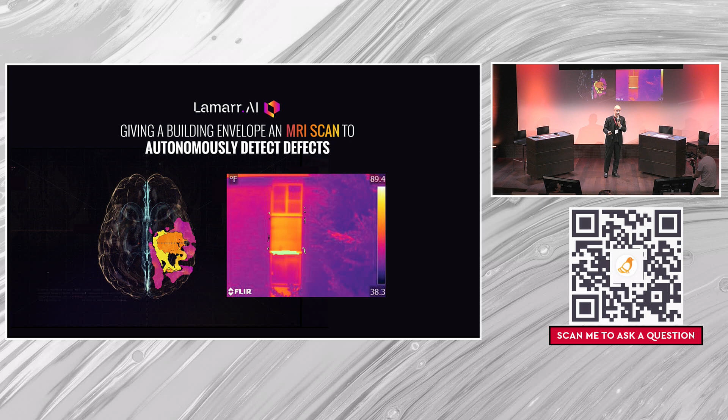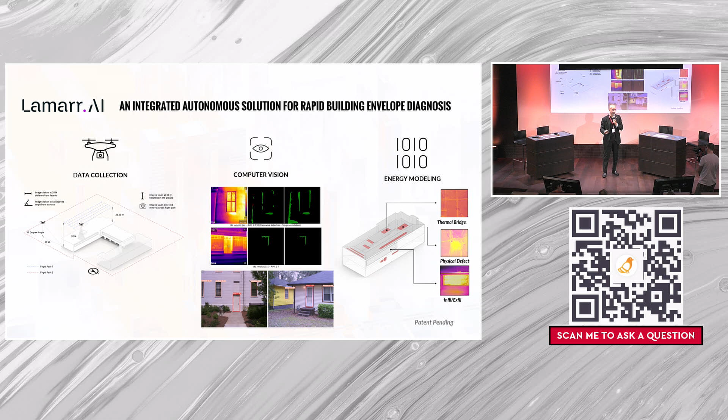It is an integrated autonomous solution for rapid building envelope diagnosis, which includes the data collection itself, the use of computer vision to identify and then analyze those thermal anomalies, and then inputting those into a 3D model, a digital twin that then produces an energy model.

So the company provides any one of these, or a subset of these, or all of them: flight planning, data collection, automated image processing based on a machine learning model, geometry construction using RGB images and photogrammetry, and energy modeling. By way of thermal images, we have a machine learning model that identifies and then

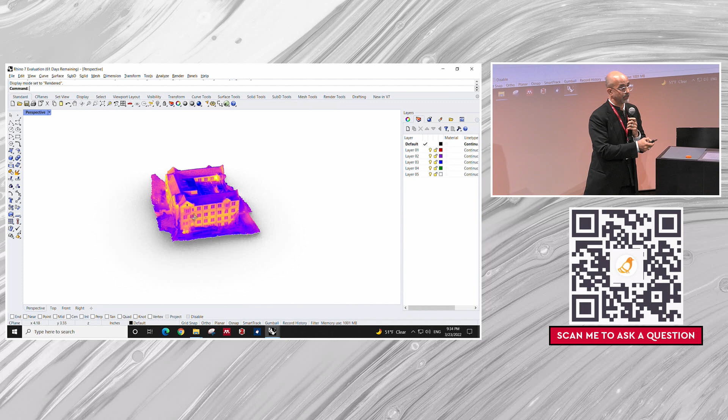classifies those thermal anomalies and then places them on the photogrammetry-produced 3D model. Those anomalies in yellow that you see there are tagged, they're identified, and they then lead to the building energy model. Today, our algorithm sits in the cloud, and a user uploads those images. The analysis: we can analyze 1,000 images in under 1 second to give you the identification and the classification.

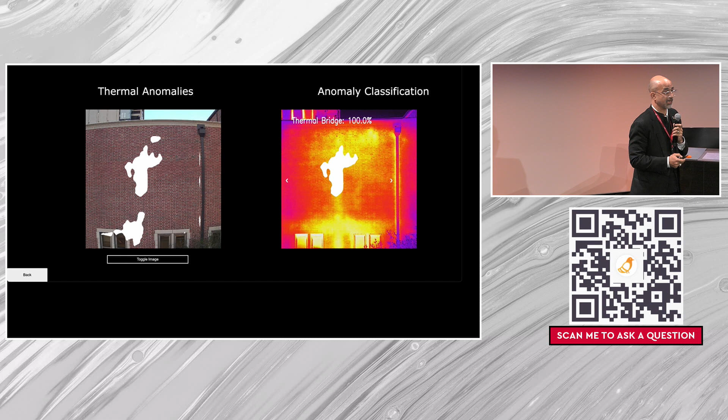And then the user can click on those anomalies to then decide how to repair, how to respond to that thermal anomaly in the building.

Our technology saves 85% in time, 90% in cost, and is safer and more accurate because you don't have people at the site climbing buildings or on scaffolding with a handheld thermal camera.

The market is about 150 billion globally, 41 billion for US retrofit, and 22 billion the envelope retrofit market. In particular, our beachhead markets are New York and Boston, although our contracts now are national in the United States.

Our 2 revenue streams: the first product is for large building operators, owners, and managers to upload data, have it diagnosed, and then to repair. Our second market, which we will start in about a year or so, is the homeowner who also captures images using a smart camera, a thermal camera on a smartphone, uploading images, and then we diagnose, and they then do their own repair.

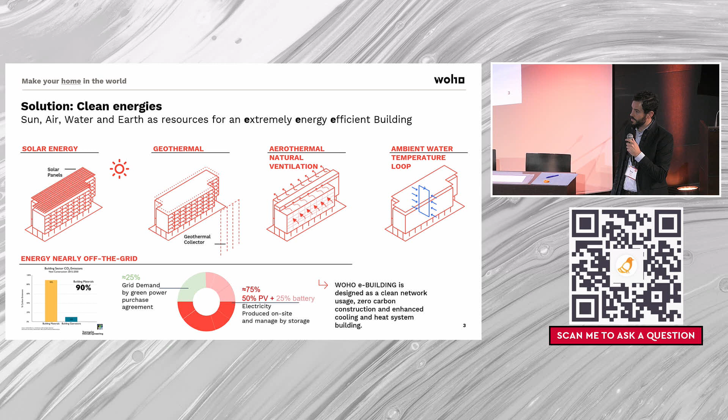As mentioned before, construction generates around 40% of total CO2 emissions, and uses up to 36% of total annual energy use. But today, there is a solution. These clean, renewable energies allow us to produce energy on-site and even, as was mentioned before, to compensate the embedded carbon during the operational life.

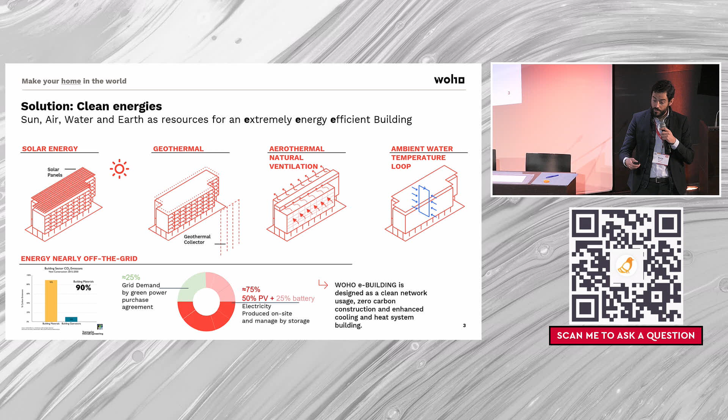So then the burden of the CO2 belongs to the materials. After 30 years of practice, MIT professor Antón García-Abril, along with Débora Mesa and the team, we have been researching different materials and construction systems, such as pre-stressed concrete, steel frame, GFRC, nanocrete, and CLT. The conclusion we got is that to have the best product, we needed to take the best of all these worlds and combine them.

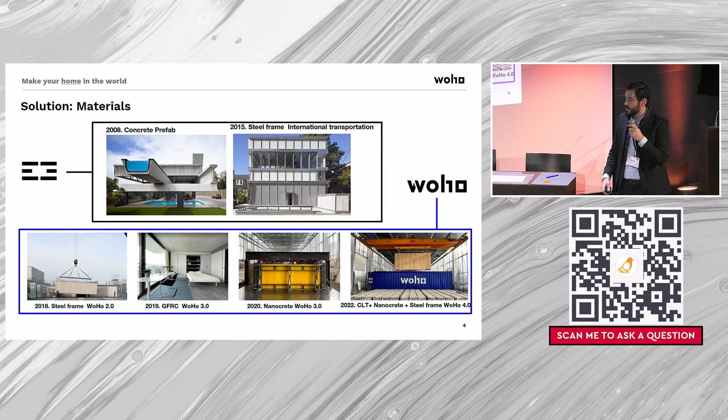So today, in our product, we use CLT for the non-structural elements and nanocrete, which is concrete with GGBS to reduce clinker, for the structural elements.

Usually these materials and these energies are super expensive. So the only way for us to make an affordable product, and to always certify and guarantee the quality of the product, was through industrialization.

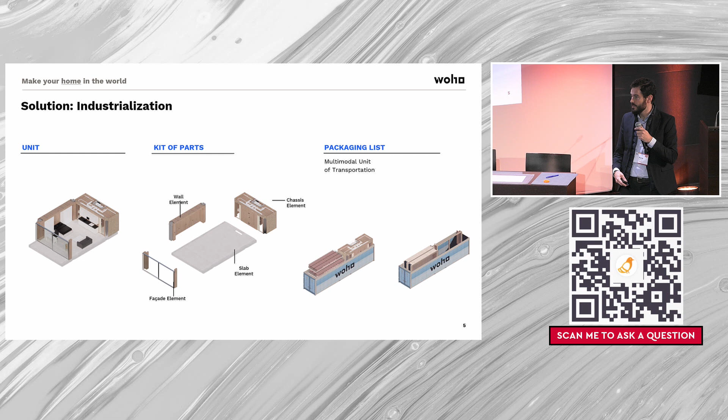We have integrated from day one all our suppliers, and they have been helping us avoid redundance and unnecessary movements, to avoid waste materials. We have also integrated from day one simplified suppliers, logistics, and supply chains.

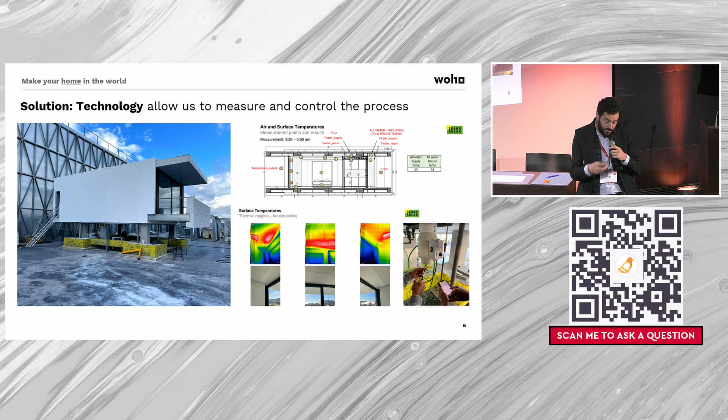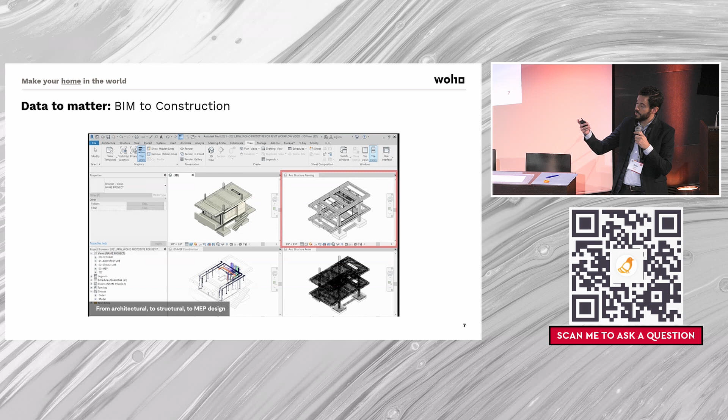Once we have the perfect materials, the perfect energy, and the perfect construction system, we needed technology that allows us to measure, audit, and certify all this product and this process. Here, for example, in this video, you can see how today BIM models allow us to integrate in one single file all the construction disciplines. We also embed in this file all the material properties, weights, volumes, etc. And all the information is there.

As you can see here, we can perfectly jump from the digital world to the physical prototype, and it's a perfect match. Once we design one unit, we just need to test it, certify it, run all the tests on it, and then we have what we call the pixel, or the Lego piece. Once we've designed this, we just need to combine it to create different buildings. Like Lego pieces, we can play with them to combine and generate totally different buildings.

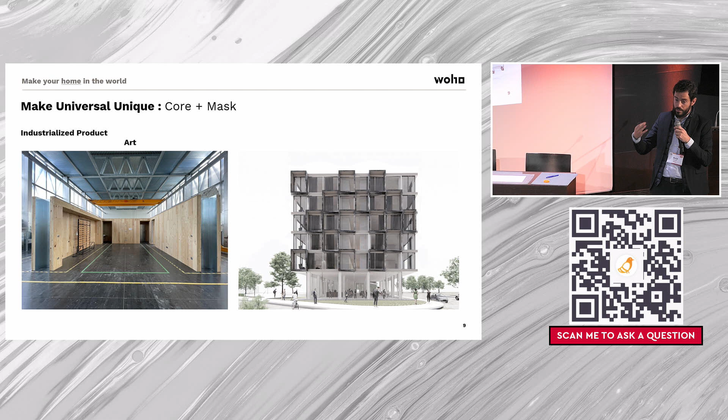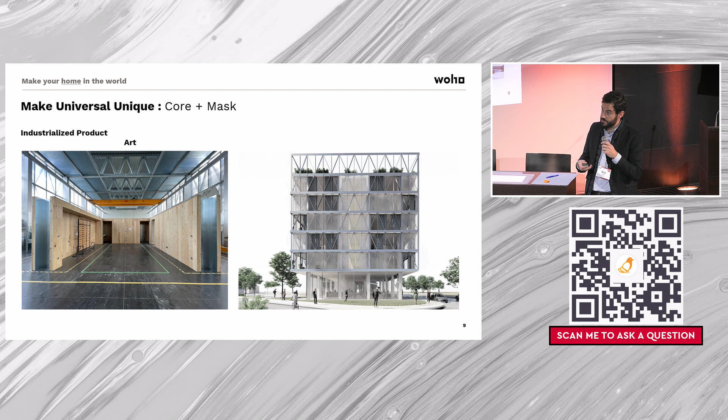Something really important is that everything I've already explained is how all the product-based industry works. And it's obvious that in architecture or buildings, when we talk about industrialized systems, people usually dislike them because they think the building would be soulless, repetitive, not connected to the place. That's why in Woho, even though 90% of the building remains always the same — what we call the core — we always have the mask that is per project, making every project unique. This is something we design with the client to comply with client requirements and often code requirements.

I'd like to conclude saying that at Woho we sell carbon neutral affordability, art and tech, and we use prefabrication to achieve this. It's not that we are a prefabrication company.

As I said before, we are here today because we are willing to partner with investors, GCs, developers that have the same mission and vision that we have at Woho, the ecological and social mission. We think that the Bouygues group can be really helpful for us, especially the construction and real estate team, not only in France, but also in all the countries they operate. Thank you.

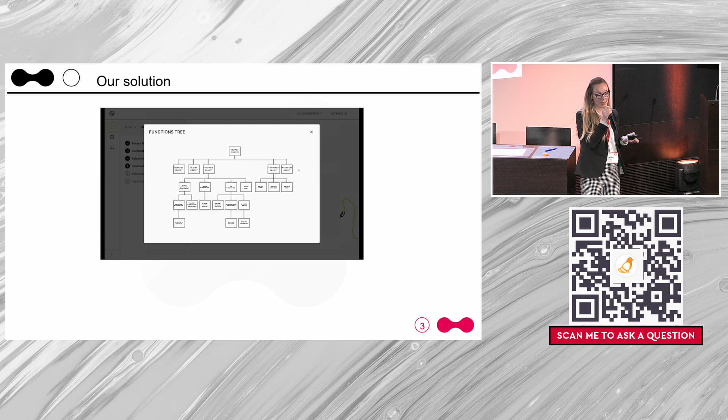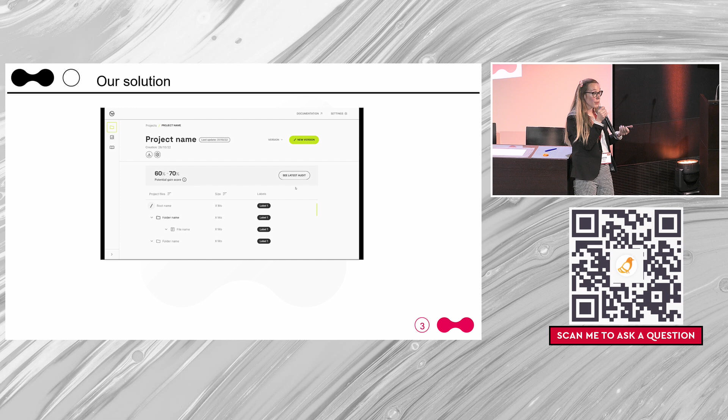The goal is to give information about, for instance, where the time is spent in my application — is it in computation, memory operations, or control? Then we give the developer information if there's any bottleneck in energy consumption, latency, or memory. And finally, are there any optimization potential in the source code? We also give information about this optimization potential — how much energy can you save by doing this optimization? And of course, the second tool does this optimization.

The first tool is planned to be launched in the beginning of 2023, and the second tool is planned to be launched in summer 2023.

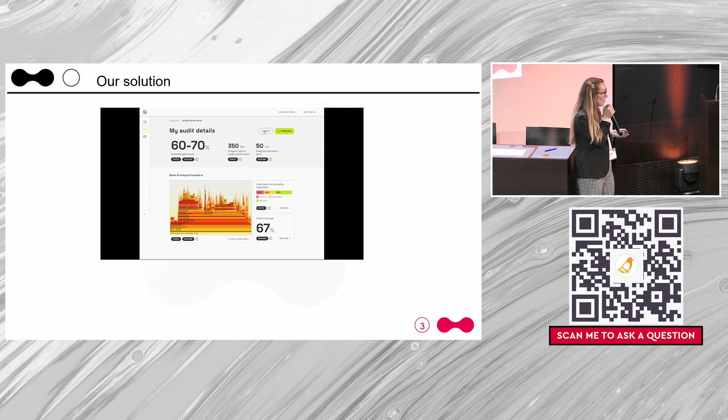Our business model: we sell both licenses of our tools and services. The licenses' prices depend on the duration and the number of users. As for services, because we come from research laboratories, we can sell different types of services, ranging from developing a real algorithm from a problematic to just optimizing the application.

This project comes from my PhD research work. I defended my PhD in IETR in Rennes in 2019.

Of course, we are interested in partnership, business, and scientific research. We still do a lot of research and teaching because we really think it's important to present the importance of optimization to the next generation of developers.

And I will leave you with a few figures about what we can do with our optimization tool. Thank you again for this opportunity to present Yubik to you. Thank you.